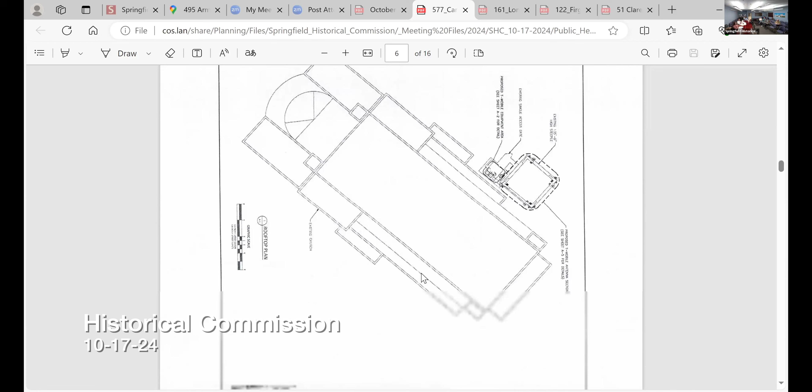So we're just replacing existing panels, we're not adding additional panels somewhere else on the building. Not according to these. There won't be any additional conduits on the outside of the building, just replacing the panels that are there. Everything is just the 3 sets of 2 antennas each, so 6 total antennas will be swapped out.

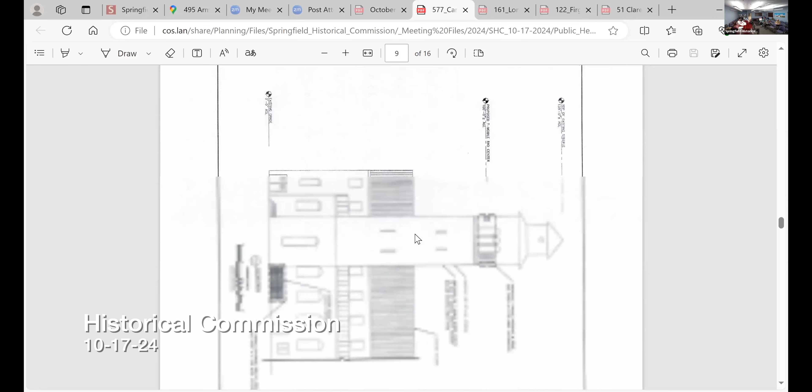There will be some new cabling that will be added, but it's going to follow the same cabling that already exists, which is inside, it follows within the church wall. You can see that within, they're really...

Not fun to read the exhibits. They're gonna paint the antennas to match, so T-Mobile tries that. Whoever's doing it, if they do an addendum, it's our responsibility to send you a new copy of an invite to comment letter, and then we do this process.

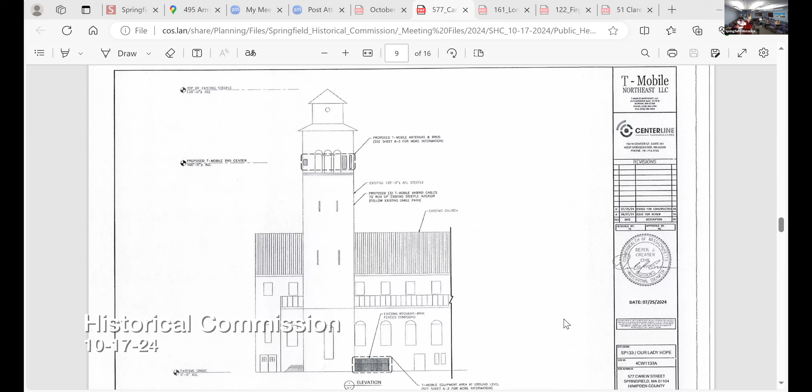But at this point, this is the lease exhibit that shows the product that they propose. Any other questions from commissioners?

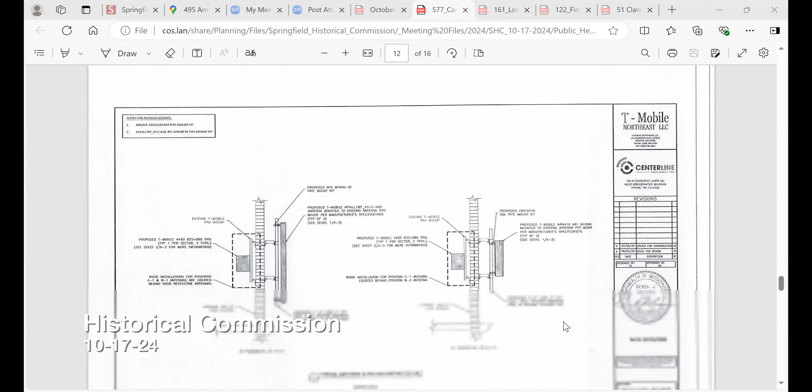Is there any change in the size of the antenna that's being replaced? That's a good question. They're relatively the same, I think. The measurements are probably not the same, I couldn't tell you them off the top of my head. They're lease exhibits - they're not going to be noticeable to the naked eye from that distance, probably within about a foot at most.

In which length, width? You must have old dimensions versus new dimensions in there. If you scroll down, there's gonna be dimensions. It says it right there - 7 foot. That's for the mounting detail.

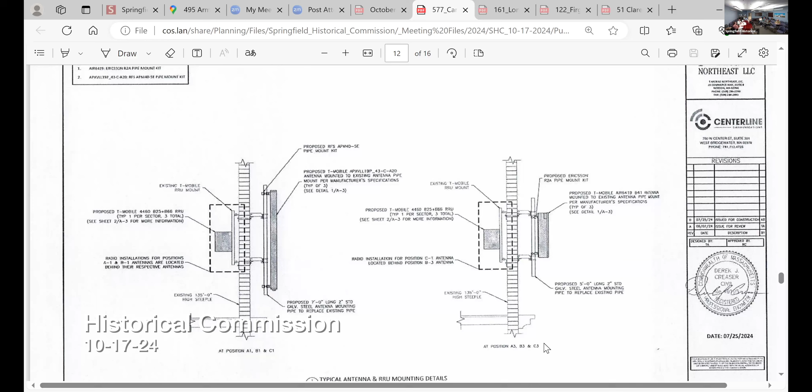Yeah, if you scroll down a little bit further - only because if it's a significantly larger thing, it could be visually different than what it is now. Although it's not likely, I'm just suggesting that I am interested in the size of the antennas that they're putting up.

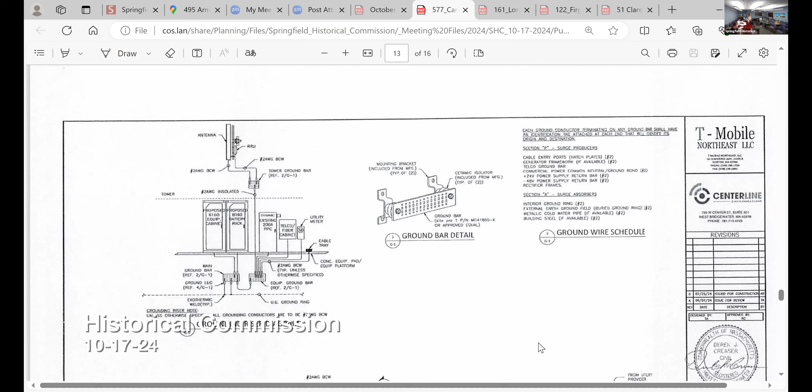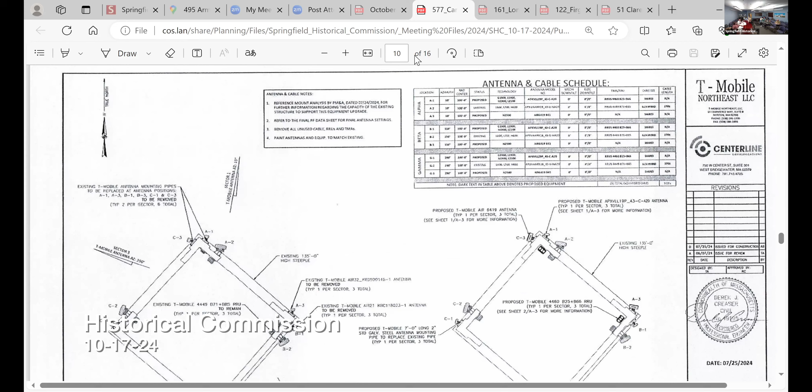I disagree with that - they're usually at the bottom. Maybe if you go up a little bit higher, this is the part that doesn't look at too closely, but they usually have those diagrams in detail. All right, so if you zoom into that antenna and cable schedule, it should tell you all the details. You see number 4 says paint antennas and equipment to match existing stuff.

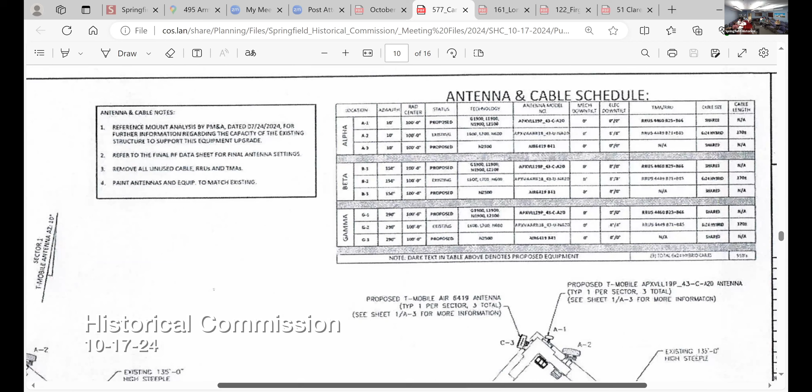And unfortunately, it's not great to read at this size. No.

Sizes - well, I can't read it. Yeah, don't feel bad, we're in person on the big screen and we can't really see it well either. Let me see if I can.

That's okay, it's not that important, other than it's not going to be a dramatic change in the visual. I look at about 20 of these every day, and they're usually antenna swaps, and they're usually a little larger, but not in any way I'd say is visually significant. They're usually like 100 to 150 feet up, and they're usually between 50 to 65 pounds - that's usually the number I remember. I'd say if there's any difference, it's gonna be in length, not in width or depth, and it's usually gonna be within 6 to 12 inches.

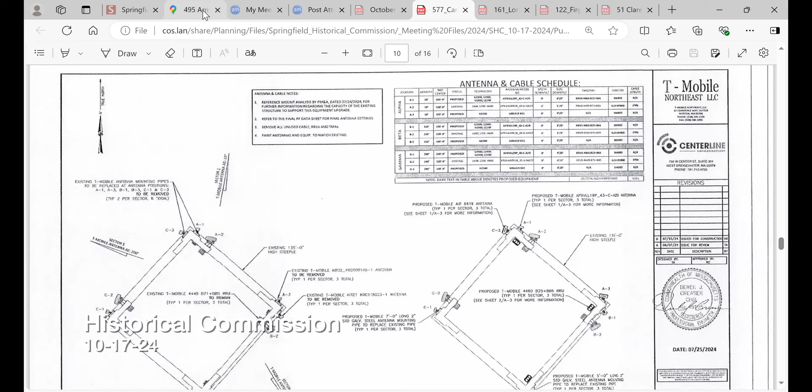But I apologize, I don't remember that off the top of my head. That's fine. Any other questions from commissioners on that?

Want to read this first? Yeah, there is a letter in there if you want to go to public comments. Okay, I'll just read the letter into the record.

Okay, we'll go to public comment. Would anyone like to speak for or against the replacement of the antennas at 577 First Street? Okay, hearing none, I'll close the public comment.

I'll entertain a motion from the commissioners to approve the proposed replacement of existing antennas at 577 with the panels painted to match. All existing conduit will stay inside the building as it is now. So moved.

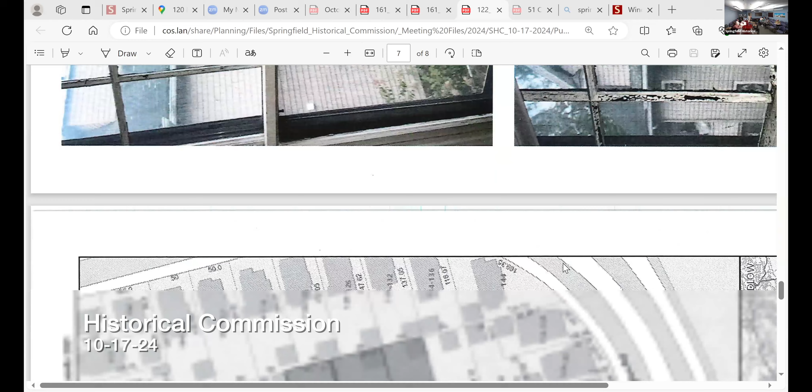Very nice. And I know you'd seen a mix, is there an idea of how many would be with grids and without? You get a pretty good impression of which windows were supposed to be 6/1, and we would mimic that all the way around. 6/1, there's only, I believe, one that is a picture window and it looks to be original.

And I did send pictures to Mr. Allen about that one, and we would just do it as a picture window. So we're staying true to the grid pattern around the entire second floor, everything that's already 6/1 would stay 6/1. That is correct. And then they'll split that middle, and then you have the lonely one.

So the lonely one, we're not actually touching that one, we're just doing the second floor. All right, okay, giddy up, and maybe I'll see you again when we do the first floor. Excellent.

With that one. So, do y'all need to see that window up close?

You want to hold it? That would be, yes, thank you. Hi there. I don't know how close the camera is, because I don't have one. It's like right here. That's perfect. Yeah, it's gonna be the brown color. It'll be Tudor brown, yeah.

This would be just the second floor windows? Yes, sir.